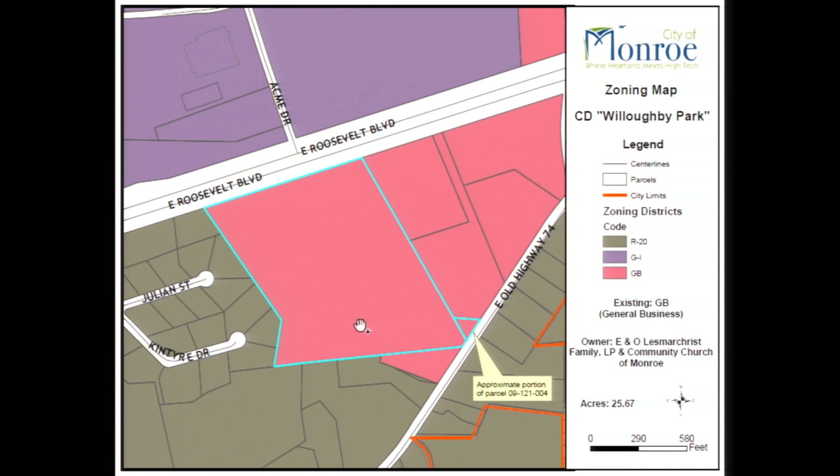The applicant is requesting the conditional district in order to develop 84 single-family lots. The total area of the project is 25.67 acres, with 7.9 acres, or 30.8% of that, left as common open space. The density of this project is

3.27 units per acre. The minimum lot size proposed is 5,500 square feet, and the average lot size is 7,155 square feet. The proposed setbacks are 20 feet for the front, 10 feet for the rear, and 5 feet for the sides. The project is required to provide at least 12.5% open space, which would equal 3.2 acres.

The total area of open space provided is 7.9 acres, or again 30.8% of the overall site. The open space will also include a gathering area with picnic tables and a fire pit, a playground, and a walking path. Just to orient you to the site, East Roosevelt Boulevard is up in the northern part of the site plan, with East Old Highway 74 down here to the south.

The proposed amenity areas are here, which is the gathering area with the fire pit, the proposed playground, as well as the walking path here near the stormwater management in the south of the site.

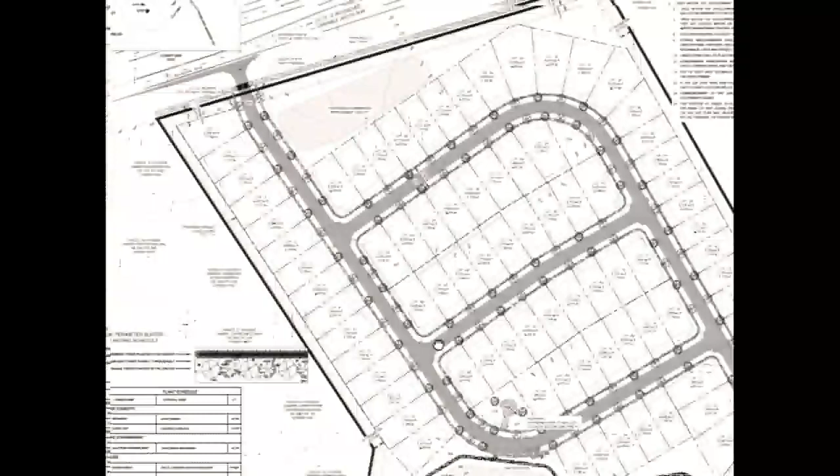Again, just to orient you, the block surrounding the site plan is the 25-foot landscape buffer, which will have trees and shrubs as outlined in this diagram. There will also be a 6-foot tall fence located along the back of lots 1 through 14.

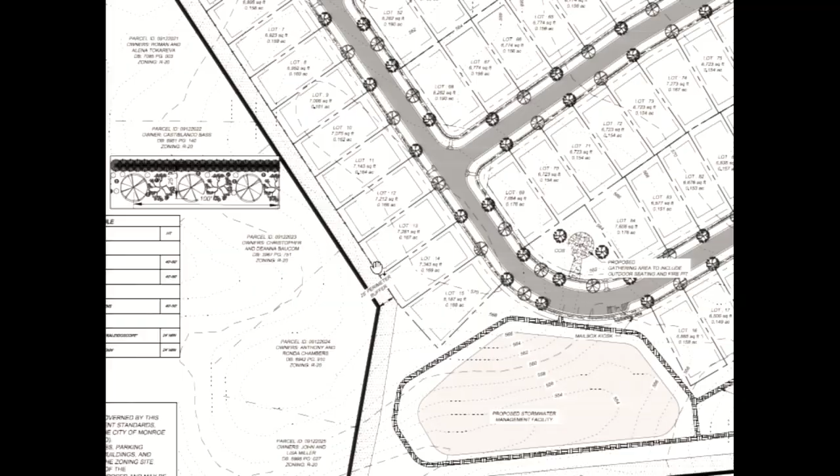A 5-foot wide sidewalk will be provided along both sides of the interior streets throughout the development. A 10-foot wide multi-use path will be provided along the exterior of the project along US Highway 74, or Roosevelt Boulevard. The applicant will also be required to provide stormwater management to treat the stormwater runoff for the project. The stormwater will be evaluated and reviewed, if the project is approved by City Council, at the building permit stage of the process.

The development is proposed to be accessed by 2 entrances. One entrance will be a right-in, right-out only off of East Roosevelt Boulevard to the north. There will also be one full access entrance proposed on East Old Highway 74. This entrance off of East Old Highway 74 is accessed through the adjacent parcel.

This entrance is not required, so it's possible it would not be constructed and the proposed development street would end in a cul-de-sac or other turnaround approved by the city's engineering department. Please note that part of this rezoning does include this portion of the property for the access point, so it's there if they need it.

As far as getting access from the existing property owner, they are working through that, but it is not required due to the number of lots. So it's possible the development would just end in a cul-de-sac here at the property line, or something similar as approved by the engineering department. Again, it's not required because they have less than 100 lots.

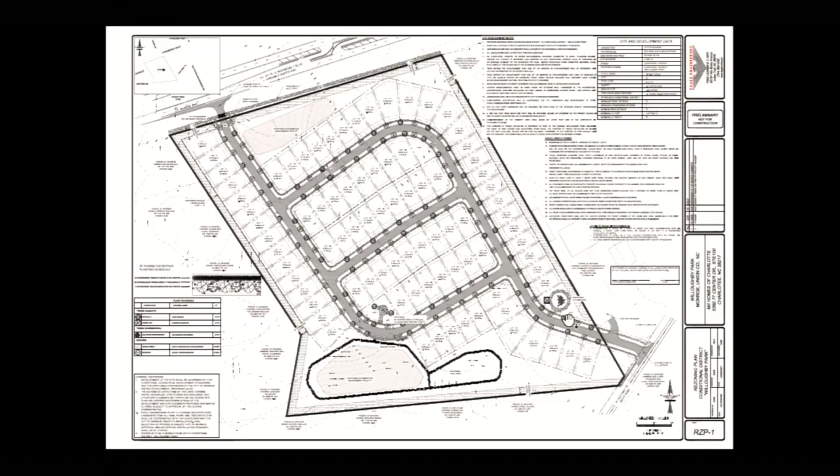The developer is proposing 75% of the homes will be 1,900 heated square feet, with the remaining 25% of the homes at least 1,700 heated square feet.

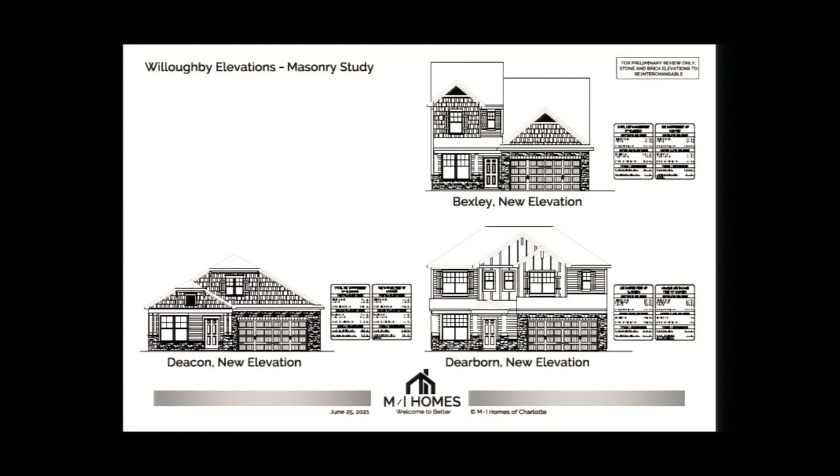The proposed exterior building materials will include fiber cement, stone, stucco, and/or brick. A minimum of 25% of the front cladding will be either stone, stucco, or brick. Vinyl will only be utilized for trim work.

Houses will be built on slab foundations, with a 4-course brick along the slab. Each home will have a minimum of a 2-car attached garage. All front-load garages will have carriage-style trim or hardware that mimics carriage-style garage doors, and driveways will be able to accommodate at least 4 vehicles.

This development falls within the following school districts: Rockrest Elementary, East Union Middle, and Forest Hills High. According to Don Ogrum with the school system, the proposed development is not expected to adversely affect school enrollment versus capacity.

The applicant did hold a neighborhood meeting on June 3rd, 2021 at the Community Church of Monroe, which is adjacent to this site. The meeting also had a virtual attendance option through Zoom. Approximately 15 individuals attended this meeting.

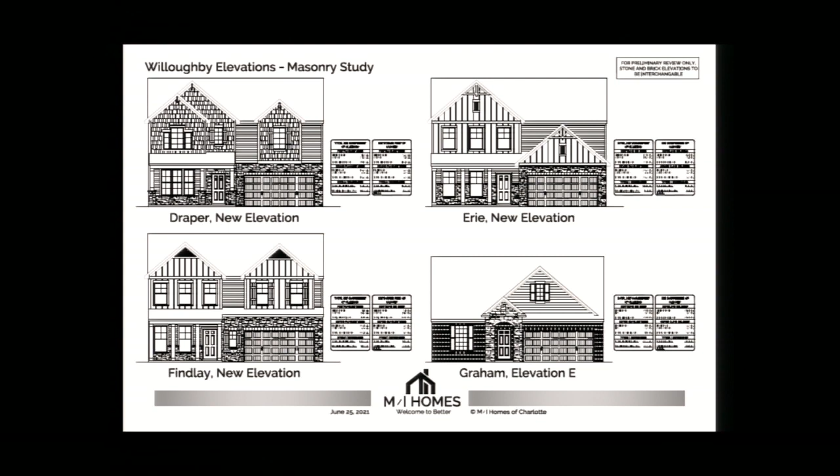Rezoning notification signs were also posted on the property, and 32 official rezoning notification letters were mailed to adjacent property owners, located within 150 feet, 10 days prior to the public hearing.

The land development plan indicates this area is suburban. While residential uses typically take the form of neighborhoods with uniform housing types and densities, a mix of housing types and lot sizes is preferred in suburban locations. The density for suburban residential is 2 to 4 units per acre.

The proposed project is consistent with the future land use plan. Planning staff recommended approval of the project, while Planning Board recommended denial of the rezoning with a 5-2 vote.

The following changes have been made since the Planning Board meeting. The applicant increased the heated floor size from 1,600 square feet to 1,700 square feet for 25% of the project, and 1,900 square feet for 75% of the project.

The applicant also added a solid opaque fence along lots 1 through 14 for additional screening. They increased the street tree and yard tree sizes from 1.5 inches in caliber at planting to 3 inches in caliber at planting, and added a fire pit in the proposed gathering area near lots 69 and 84. I'll be happy to answer any questions you may have.

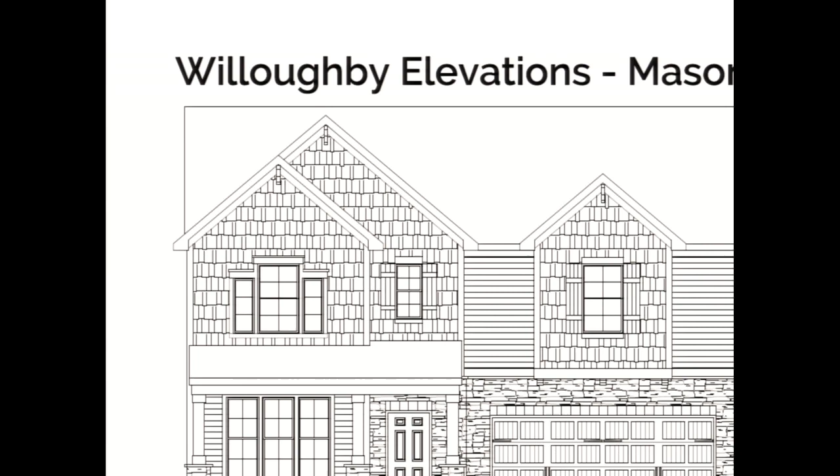Gary, I have a question. The buffering between the Knollwood subdivision and this proposed subdivision, you said was 25 feet? Yes, and then the fence as well along the lots that abut that neighborhood.

What was the planning board's main objection? Planning board had concerns with the density, the overall density. I will say it's more dense than the majority of projects we've seen recently, but it is within the 2 to 4 allowed by the future land use plan.

How many houses per acre? They're at 3.27. That's not the footprint, that's the whole taking in extra land, is that right? That's for the whole site, including their open space.

So you said it was a 5-2 vote with planning recommending denial? Mhm, yes. But you stated that they went back and made changes per the request made by planning board? They didn't reduce the number of lots, but they did increase the house sizes, and that was another concern we hear from planning board often is house size as well.

So the 1,700 square feet for 25%, and then 1,900 square feet for 75% of the project. So the majority will be close to the 2,000 square foot range roughly.

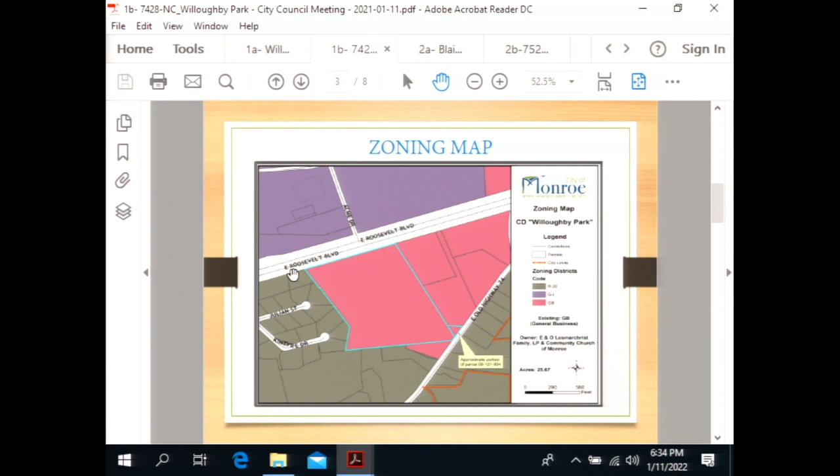Can I zoom in on this maybe? Here we go, just to give you an overall picture of the site plan. These blue areas here are stormwater ponds. This is where we'll catch and detain all the stormwater off site. We'll clean it and then slowly release it as if nothing was ever developed on the site.

This is where the kids' park is, with the gazebo and play area on the side here. This is the second gathering area with benches and the fire pit area that we added. This gives you a better picture of where the buffer runs along the entire perimeter, as well as the fence on this side neighboring these properties. That was a request from one of the neighbors to have a bit more permanent screening, so that will be 100% fenced along that side.

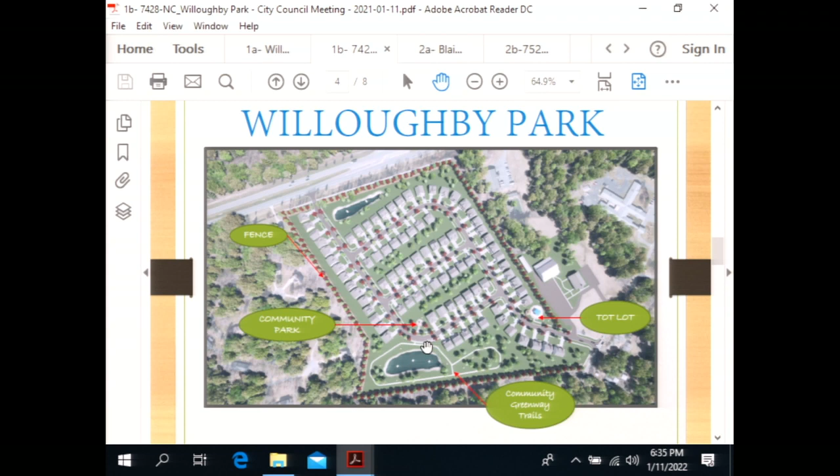Per DOT, they requested we put a right turn lane in, so coming off of 74 we'll have a right turn lane into the site as well. But you can see in between the houses there are many areas where we can leave trees and make it natural, especially on the trail here in the back. We'll leave it as natural as possible.

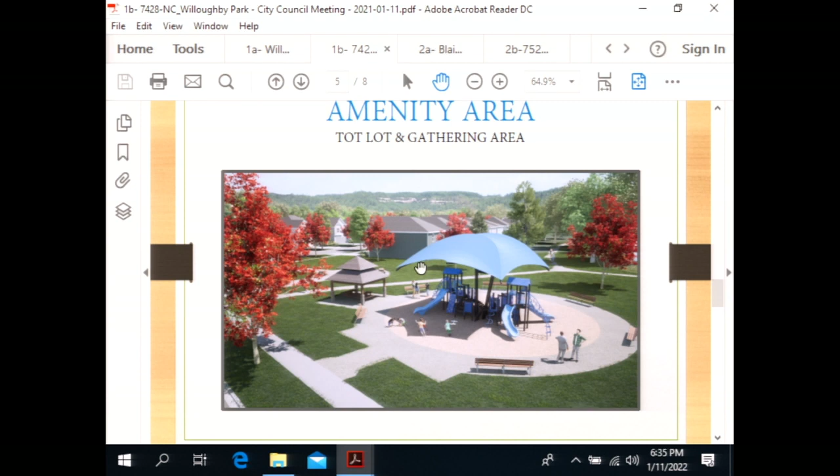This gives you a picture of the proposed park area. Again, a nice covered area with a picnic table, benches, and a nice high-end playground for that piece of it. Nice monument signs on the front for that area of what we're looking at.

I do have some elevations that I'm going to show. Mr. Chad Lloyd from MI is here to speak on the elevations and talk through their product line. I'm going to turn it over to him now to talk about it, but I'll be around for any questions you guys have as well. Thank you.

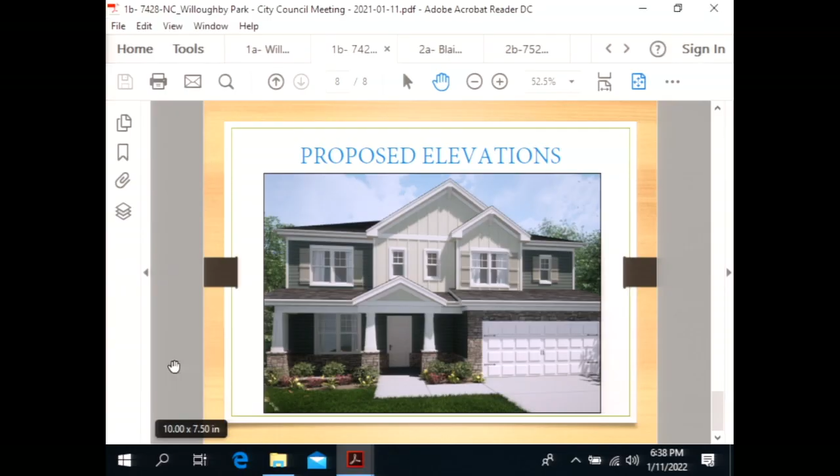We hear here all the time from new developments that abut existing developments, and those people are sorely disappointed when the areas adjacent to them, up to their property line, are clear-cut. I don't have much faith in a fence. It might look good upon being installed, but nobody ever maintains them. I can take you around and show you numerous developments we have here, commercial and residential, where those things don't last very long.

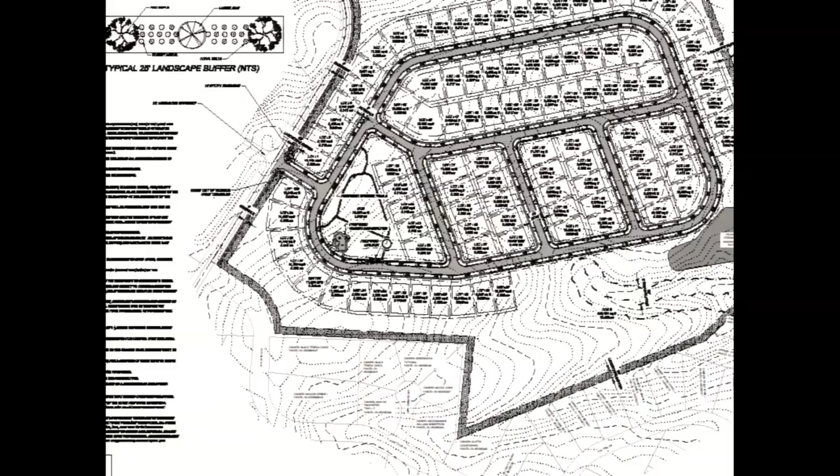The project is required to provide at least 12.5% open space, which would be 6.47 acres. As mentioned, the total area of open space provided is 21.3 acres, which is 41.12%. The open space will also include a natural walking path and gazebo with benches. The main amenity just mentioned is located here towards the entrance of the site.

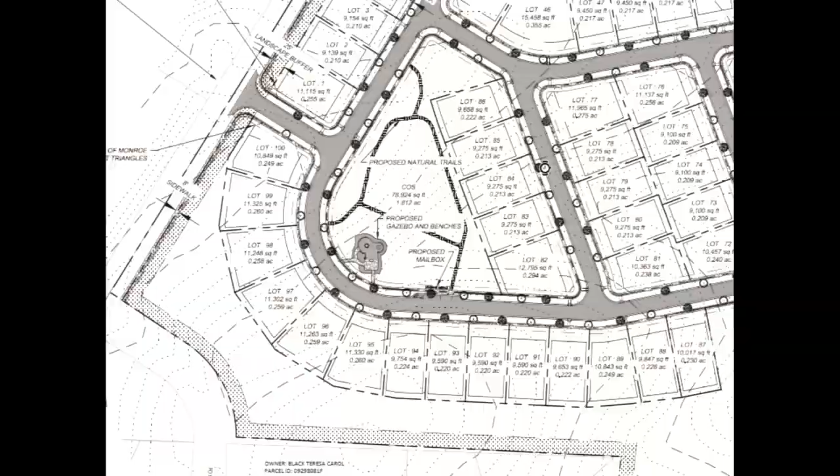Street trees will be provided at a rate of 1 per 50 linear feet, and each lot will also have at least 2 front yard trees. Additionally, a 25-foot landscape buffer is being provided along the perimeter of the site, which is the darker block surrounding the site.

A 5-foot wide sidewalk will be provided along both sides of the interior roads throughout the development. Additionally, an 8-foot wide sidewalk will be provided along the frontage of Fowler Seacrest Road.

The applicant will be required to provide stormwater management to treat the stormwater runoff for the project. The stormwater will be evaluated and reviewed, if the project is approved by City Council, at the building permit stage of the process. The development is proposed to be accessed by one entrance off of Fowler Seacrest Road. The entrance lines up with the Woodridge Senior Living Community, and a traffic impact analysis was not required by the City Engineering Department.

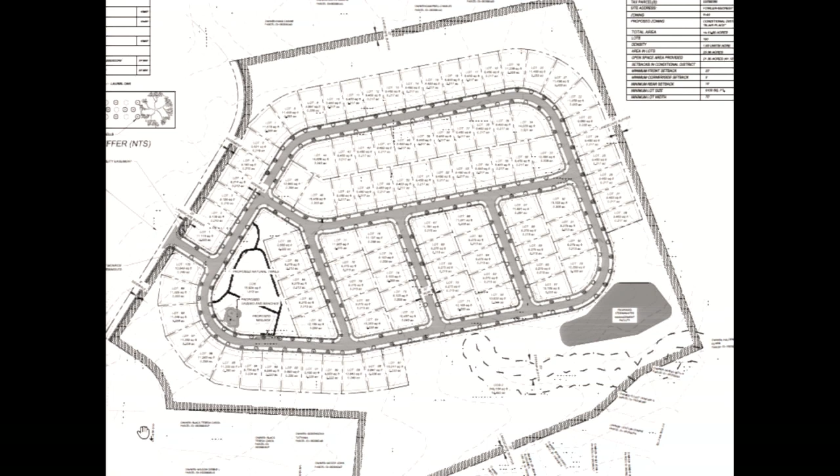The developers proposing the homes will be a minimum of 1,400 heated square feet. Primary building materials on all sides will consist of stone or brick, and secondary materials may consist of fiber cement materials. Vinyl will not be permitted as a building material, and brick veneer will be used on all of the foundations as well.

Each home will have a minimum of a 2-car attached garage. All front-load garages will have carriage-style trim and/or hardware, and driveways will be able to accommodate at least 2 vehicles.

The development falls within the Porter Ridge Elementary, Piedmont Middle, and Piedmont High School districts. According to Don Ogrum with the school system, the proposed development is not expected to adversely affect school enrollment versus capacity.

The applicant held 3 neighborhood meetings on April 21st, 2021, June 22nd of 2021, and September 8th, 2021. The meetings were a combination of virtual and in-person.

2 rezoning notification signs were also posted 10 days prior to the public hearing, and 113 official rezoning notification letters were sent to the adjacent property owners located within at least 150 feet, again 10 days prior to the public hearing. The following change has been made since Planning Board and was also mentioned at Planning Board as a change.

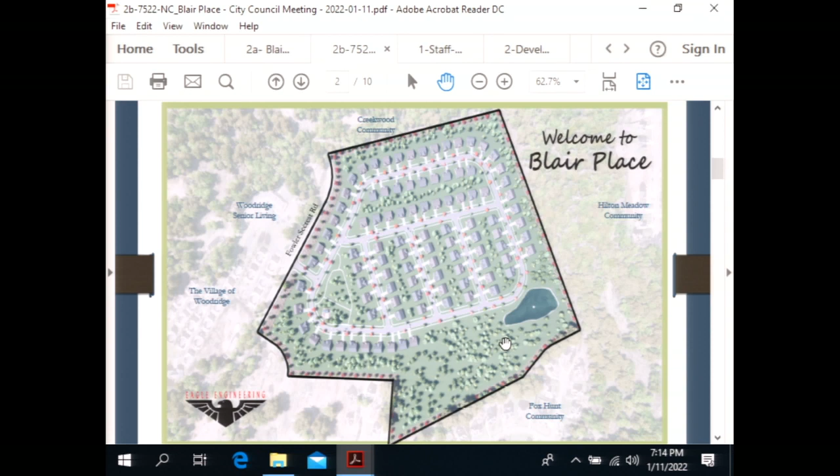Zoom in, kind of gives you a look at the way the entrance is. Again, off to the right, you can see we're leaving all the trees down here on the back side of it. It's a nice gathering area in the middle.

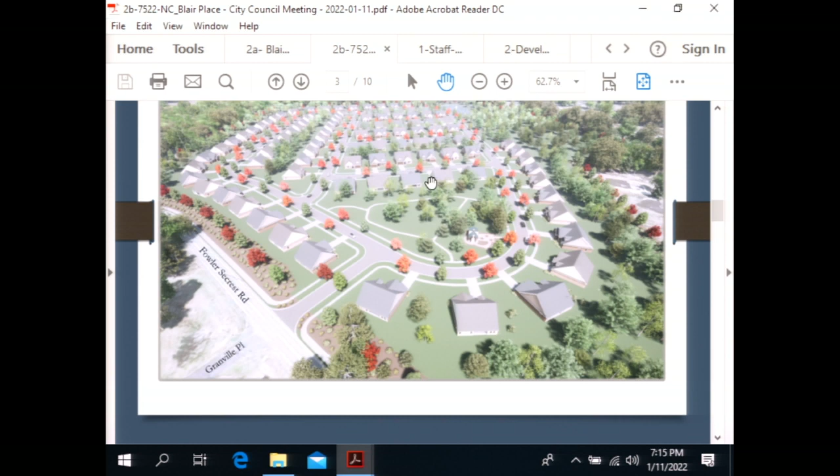One of the key features is that it's a 55 and older restricted living facility with all brick or stone houses, so there won't be any mix of materials on the facade like we normally do, that 25% mix. These are brick, stone, or stucco houses, no vinyl or hardy plank.

This gives you an example of the fireplace area and gathering spot we have in the middle with trails around it. We will try to leave as many trees in that area as possible to bring through when we have the trails. These are sidewalk trails, but we can do natural trails only because it is age restricted.

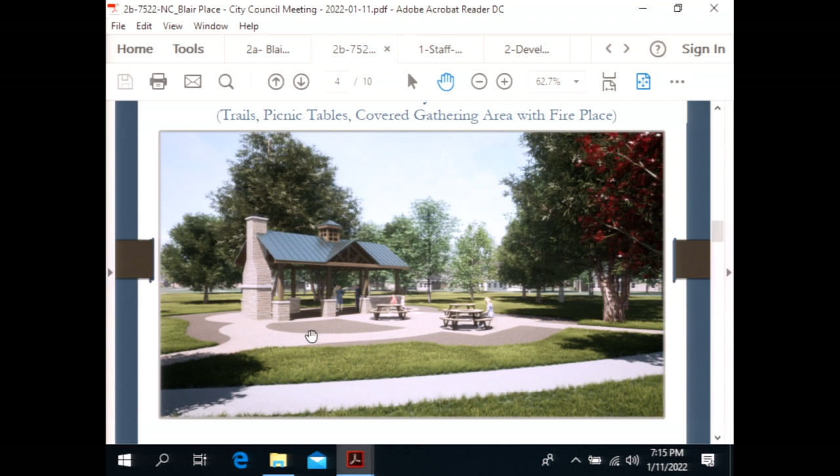The sidewalks might work better in that area, so currently we are proposing sidewalks in that community gathering spot.

Nice picture of our monument sign. You can see the front buffer, and behind it, as well as the full brick houses along that side. Again, just trying to do the upscale look.

If you ever drive on Fowler Secrest, you can see the subdivision down there that has that nice landscape buffer. That's this. So when you're driving around, you have a nice landscape buffer that kind of shields you from the houses right off the road. Even with that, we're pushed in a good bit so you won't see it. It allows it to be more natural than what you see now, that's the scrub growing over there.

We do have a sidewalk along Fowler Secrest. At least if you're talking about safety, there's a gentleman who walks that road every day. If you're ever on it, you'll see him walking sooner or later. We're at least doing our part to try to extend that sidewalk for him, to give him a safe space to walk. So we will have a sidewalk along our entire frontage.

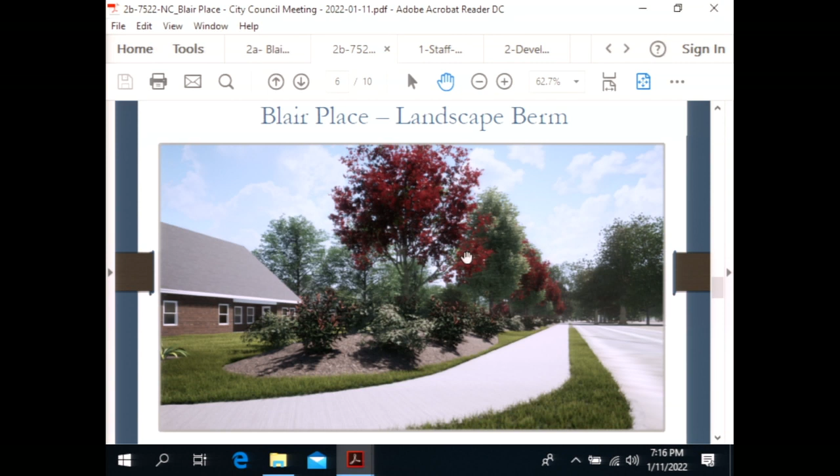Some elevations. Carrie showed you more than what I have here. You see brick or stone, a nice mix.

This is the option for the garage on the front. Everything's going to be one-story ranch style. If there is a room up top, it'll be like a bonus room, you might have a bathroom, but no two-story houses in this one. So unlike the berm and the neighboring houses where you see taller houses, this will all be one-story buildings on this property.

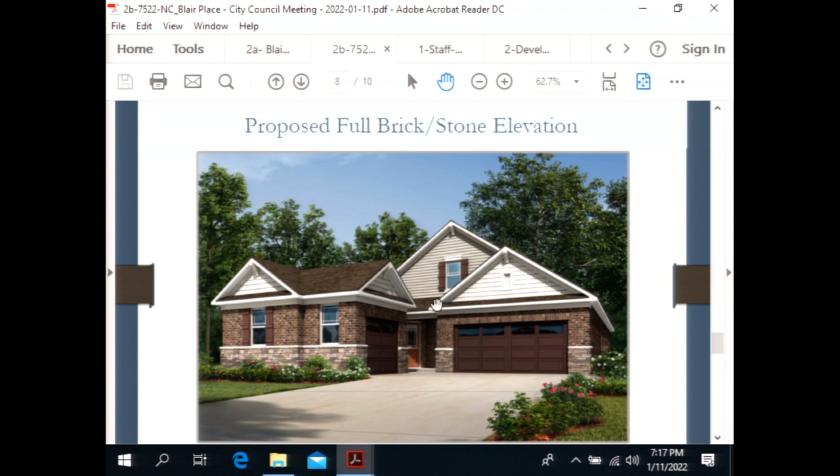And then some of the key features, and I know the big concerns are traffic and schools. This, being age restricted, has zero impact on local schools, there are not going to be any kids going to schools.

Traffic, I'm going to actually show a chart below it. This is actually less impact on traffic than a by-right product. So at 50 homes by right, this subdivision, age restricted, actually has less impact on the roads than that one.

The stormwater ponds go over and beyond. The city requires 15-year detention and quality, we're doing 25-year detention and quality. Open space, I think the city requires 12.5 or 15%, we're doing 41%, 21 acres of open space. And again, a lot of that we can leave natural, especially on the fox hunt side.

Kind of working through it, the way that the age 55 and over restriction works is it's governed by the covenants, and with that, staff asked us to send a report once a year, or the HOA will send a report to the City of Monroe once a year to make sure we're following those rules.

Reduce traffic, high quality construction, again, masonry and stone on all the exteriors, gazebo, fireplace, benches, and then stormwater pond. This is the trip count the traffic engineer did. You can see the senior detached homes total 44 versus 50 homes at a normal traditional one at 52. So this is a reduction in traffic as well.

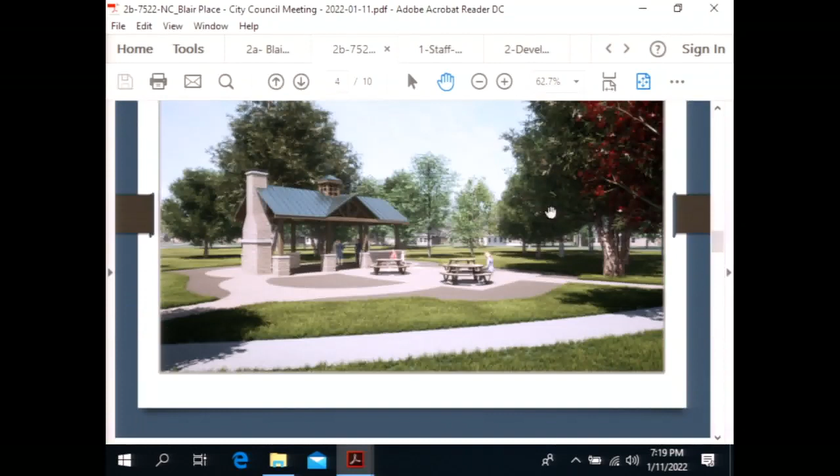So I just wanted to add a little bit of color to some of the things that Matt made, his general comments and presentation. As part of this project, when we first started, we were actually at 134 lots. We had anticipated doing a market style of project.

We were going to do an R10 zoning, 10,000 square foot lots. Over several meetings with the neighbors and adjacent residents, what we realized is the traffic was a major concern and the stormwater was a major concern. So we said, okay, what can we do to address the major concerns that we're hearing about?

At 134 lots, we had an access point into Fox Hunt Estates. We realized right away from the very first meeting that was a non-starter. So how do we get rid of that? Well, for ingress and egress, anything more than 100 units requires a secondary means. So we immediately reduced our lot count. We went to 122, then 119, ultimately settled at 100, which is a 25% reduction. That's not a small number when you're talking about density, and obviously we're running a business. That's a substantial amount of units that have been removed.

Next, we added a right-in right-out that was close to that curve everyone has mentioned and knows about. They mentioned many times during the process that it was an issue people had real concerns about, with kids and safety and everything else. That was actually recommended by our traffic engineer and supported by DOT, but we still decided that's probably something we should remove just because the temperature doesn't feel good for this. People don't like it, they don't want it there, it doesn't make sense. So what we did was we left one main access point across from the Woodridge Senior Living Facility.

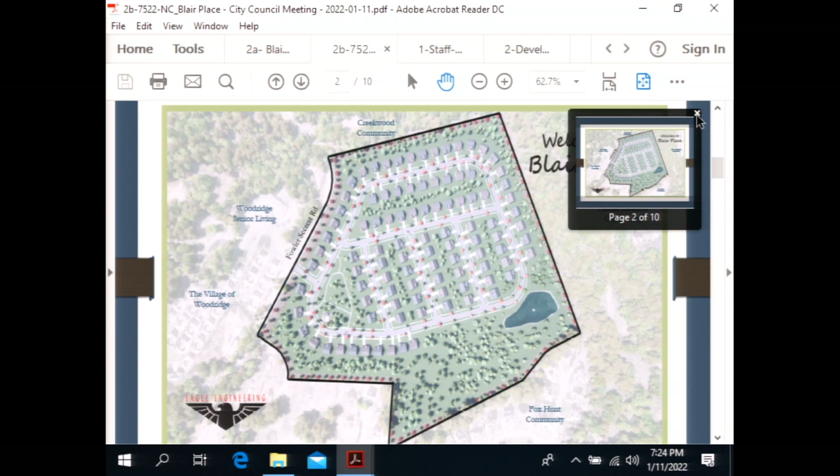Good evening. You would know that my mask would get caught on my earrings, so please excuse me. And I was one that signed up to speak before—may I do that now, or would you like to ask questions first? What would be the best way to proceed?

Again, I'm Anna Rushing Duvall. I live at 388 Triangle Road in Lexington, South Carolina. I am a graduate of Forest Hills High School and grew up in Union County. I'm one of the members of the Ann Sechrest Rushing Limited Family Partnership, which owns this land. We, the family partnership, are asking for the council's approval to rezone our property located along Fowler Secrest Road. I want to establish that this property is owned by a family, not a corporation or investment firm, but a family with generational ties to this land. When we reluctantly acknowledged that it was time to let go of our last parcel of land on Fowler Secrest Road, we wanted whatever became of this land to be very special.

We want something that will honor our memory of playing in the farm fields on the land while also serving the residents of Monroe. We believe the final proposed project for an active adult community meets those goals as well as honors the concerns of the community. The developer's desire to listen to and understand the community's apprehensions, and their willingness to make significant changes to their proposal to address those concerns, is commendable. Last week, my brother sent an email to this group summarizing the substantial changes the developer made in response to the community's concerns. I hope you had a chance to view that email and note the extent of all the concessions that have been made.

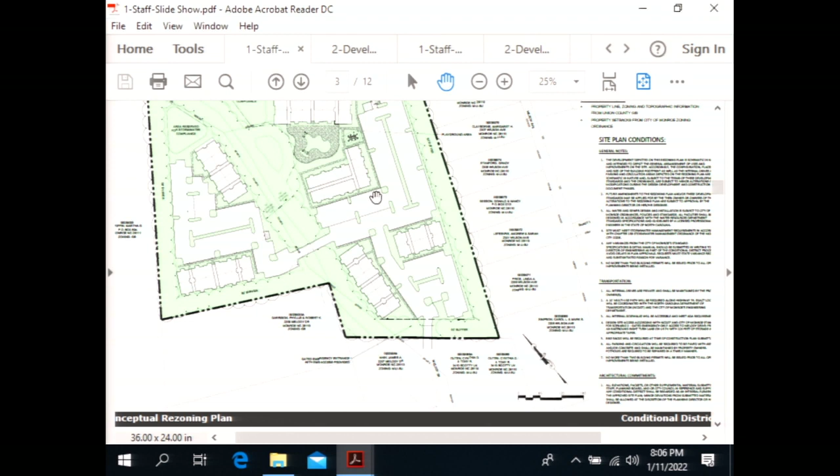The developer is required to provide a 10-foot multi-use path along the exterior of the project on Highway 74, located in this area. It would be paved like a sidewalk, but it's required to be 10 feet wide.

This project falls within the Rocky River Elementary, Monroe Middle, and Monroe High school districts. Per Don Ogren with Union County Public Schools, the project is not proposed to have an adverse impact on enrollment versus capacity.

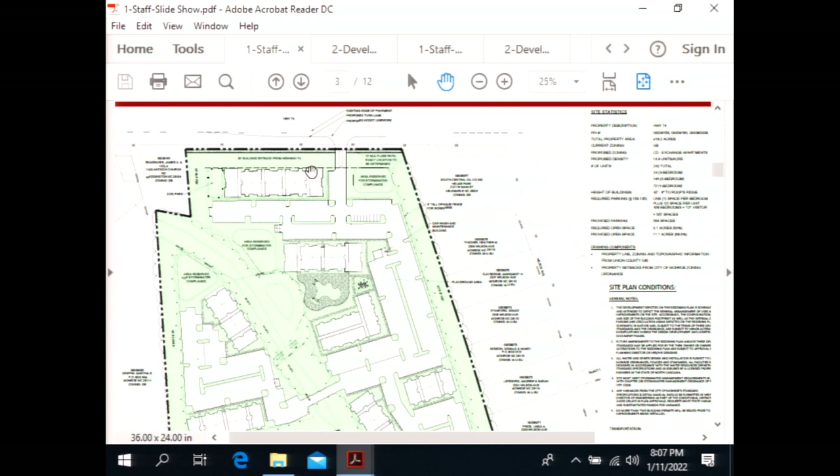This is a colored site plan, so you can see the landscaping or buffer along the sides and rear. This is why I mentioned the streams - there is a 50-foot stream buffer required. The stream goes through the middle of the site here, and that's the landscaping you see, which will be undisturbed as well. You can see the buildings here. The main amenity area will be located in this area, as well as the parking lot landscaping required for the site.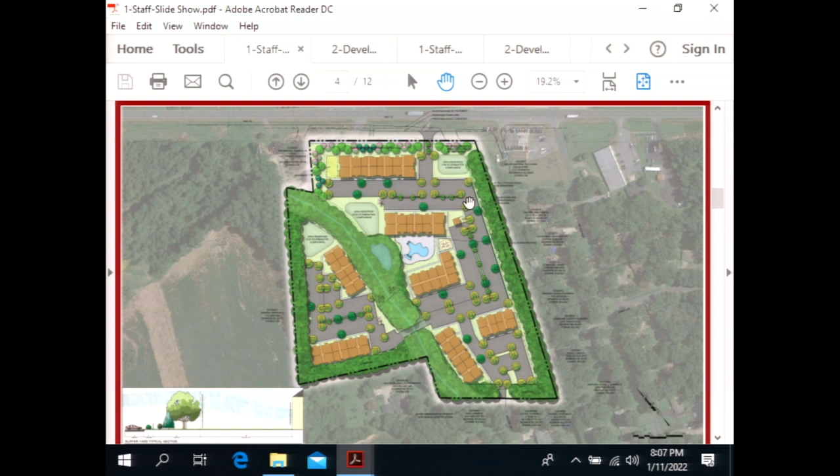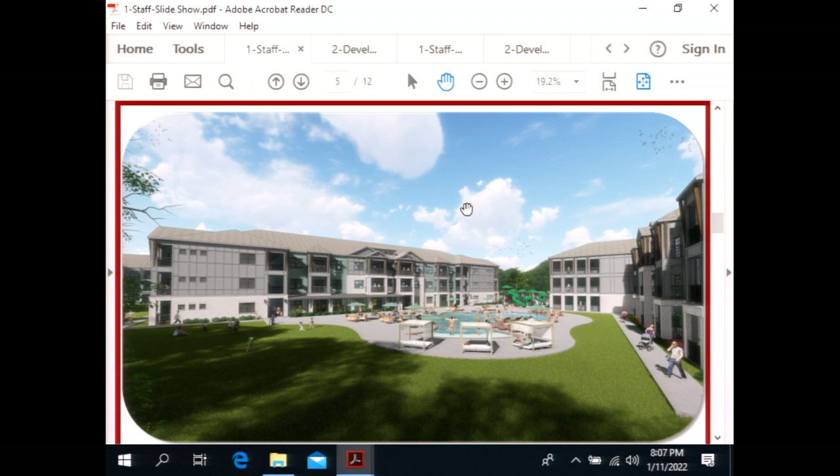For the elevations, the developer is proposing exterior building materials to include fiber cement, stone, and/or brick. Vinyl siding may be utilized for eaves, soffits, and windows. As for square footage, the one-bedroom units will be a minimum of 600 heated square feet, the two-bedroom units a minimum of 900 square feet, and the three-bedroom units a minimum of 1,100 square feet.

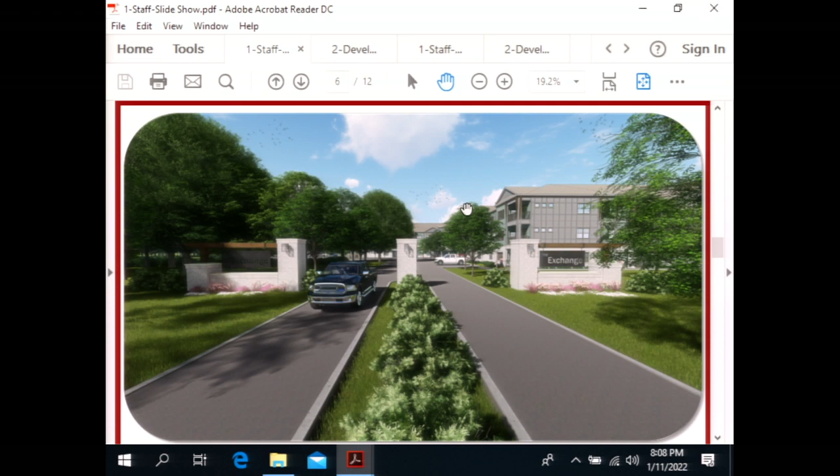Again, this shows their access going into the site, and this shows an example of the gated access that will be along the rear - possibly a different type of gate they would use. I'll say it again: the gate will be siren-activated and only utilized for emergency vehicles to access.

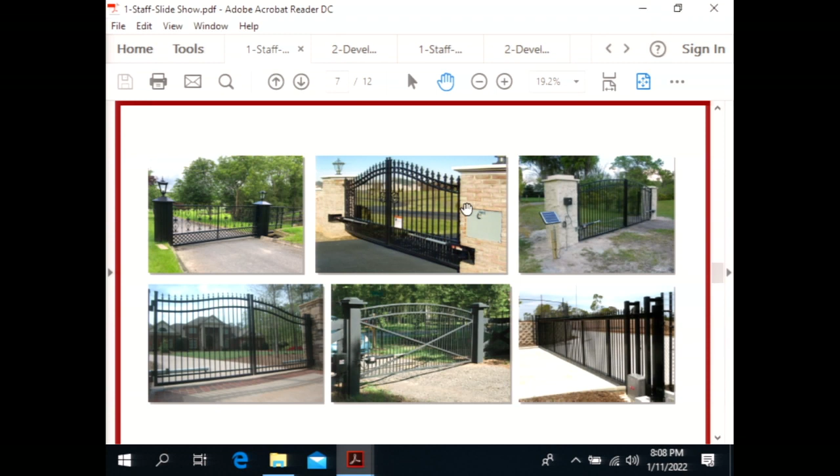This project does fall within the land development plan known as the community corridor, and a very small portion on the back portion of the suburban corridor, but primarily we deemed it to be a community corridor since it was over 95% within that area.

The community corridor does allow a density of up to 10 units per acre and does promote multifamily and commercial uses. Plan staff is of the opinion the development pattern of multifamily residential at this location at 14.9 units per acre is not consistent with the land development plan, but is a reasonable use for the property being located on Highway 74.

The developer did have a neighborhood meeting on June 7th to discuss the project with the neighbors of the area, and there was a significant turnout. We had approximately 25 to 30 people at that meeting.

The property was posted 10 days prior to tonight's public hearing, as well as there were 48 properties that will receive mail notifications of tonight's meeting.

Plan staff did recommend approval of the conditional district rezoning for apartments, and the plan board did recommend denial of the conditional district rezoning for apartments with a 7-1 vote. I'll be glad to answer any questions if you have any at this time.

You said planning board and staff both approved this? Tell me, I missed it. Plan staff recommended approval of it, and planning board recommended denial 7-1.

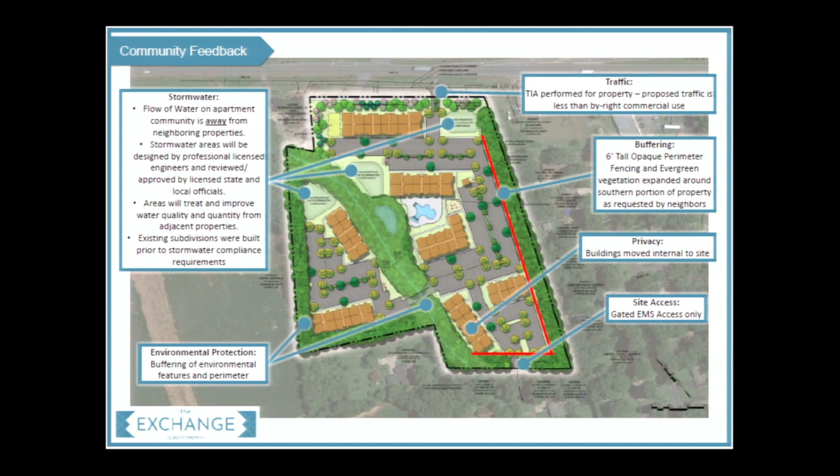The benefit of having a licensed landscape architect on staff for the project is that we automatically get a good planting plan that observes low maintenance, high quality evergreen material. As part of that privacy for existing residents, we actually reoriented the buildings so that no windows face the adjacent neighborhood. We had buildings that were up against the property line, and we have oriented those away.

So we did a couple different examples. We wanted to find the closest home to the property line and the closest home to the closest apartment building.

The closest home to a property line is 100 feet away. When you combine that with the 50-foot perimeter buffer, as well as an additional 10-foot planting strip and privacy fence that we're proposing for the site and committing to as part of this proposal, we have more than 160 feet from a home to a parking aisle, basically a parking bay.

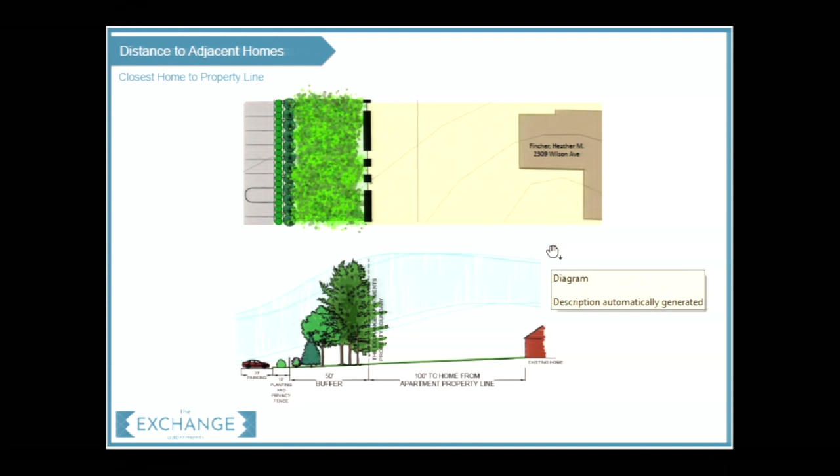The closest home to the closest apartment building is more than 210 feet away, and that does include the 50-foot buffer as well as the 10-foot planting strip and fence.

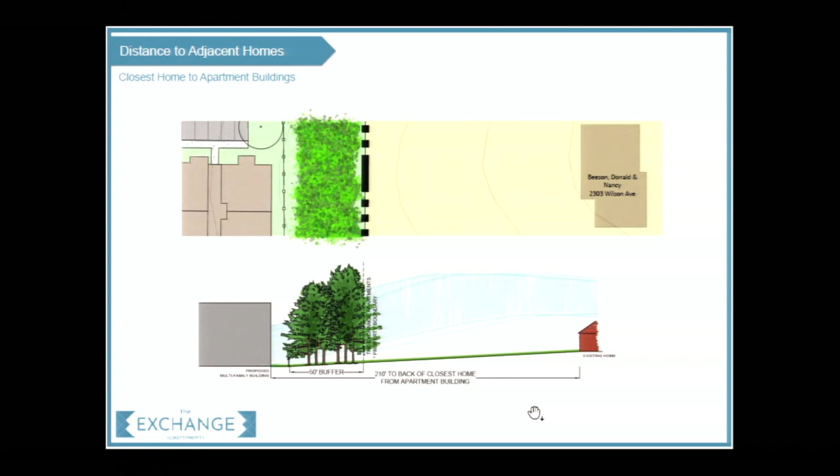We just wanted to give you an idea of how we developed this plan in the first place, to give it a little bit of history. We start with the entrance off of 74, and the first thing we wanted everybody to see is the amenity building. The amenity building would take place on the first floor of the first apartment building, and you'd be able to see through it to the pool area and the amenity area behind it.

We wanted to make sure to give the buildings as much green space around them as possible, and also to pull them away from that eastern property line to the extent that we could. We've got that gated access that is closed permanently unless there is an emergency vehicle that needs to access it and could not for any reason access it off of 74. And then we also just have our stormwater areas, our vegetated buffer, everything we've mentioned to date.

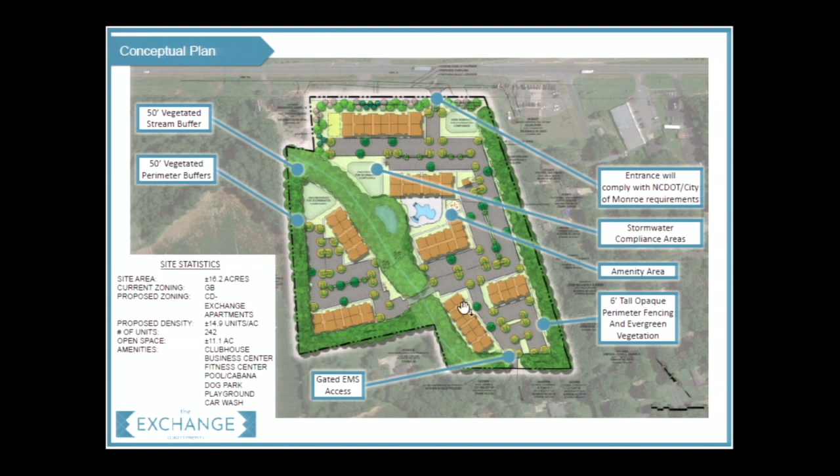This is our proposed amenities plan and list for the property. Again, pool, a bark park—it's not called a dog park anymore—play areas, car wash, fitness center, community center.

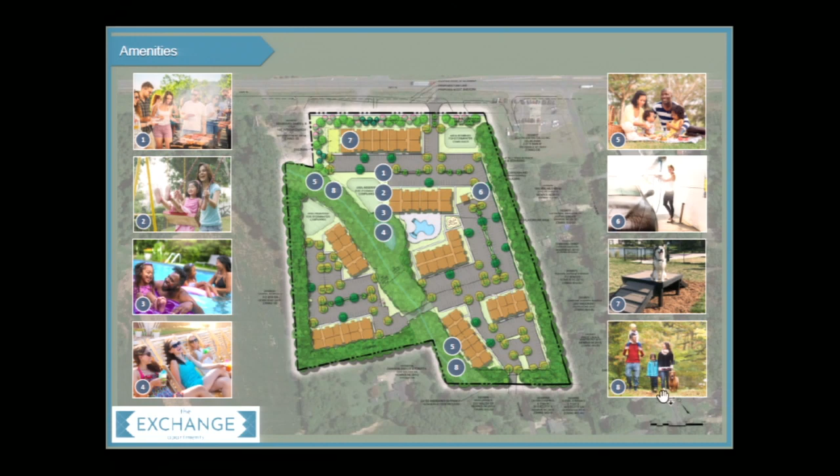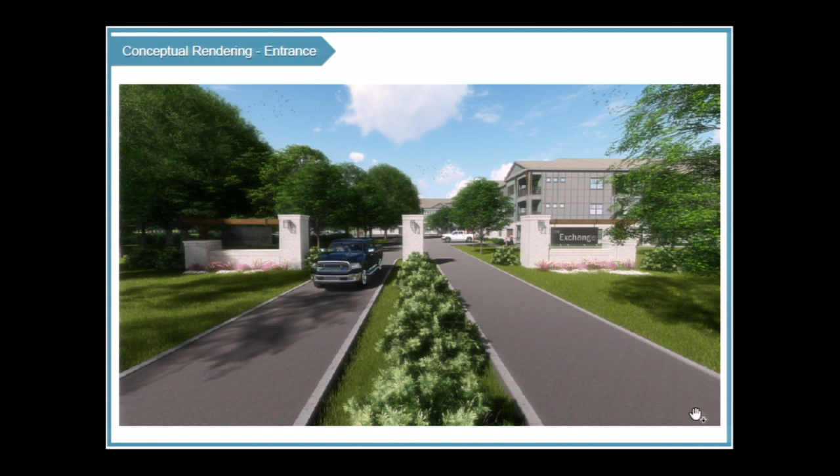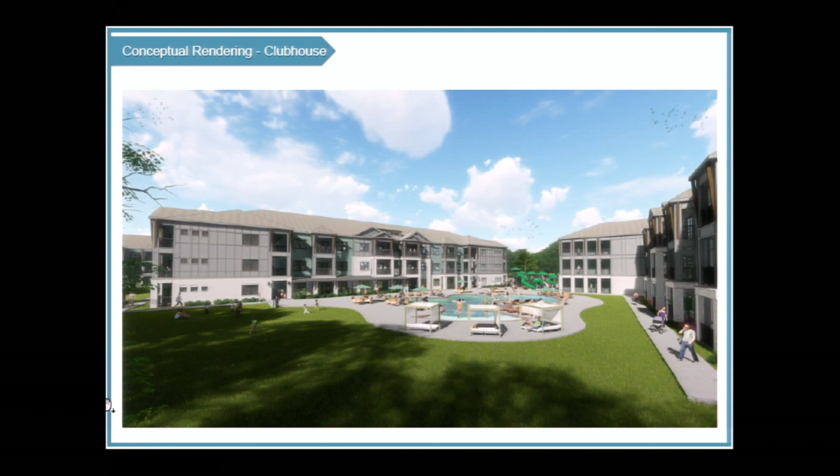Another current site condition. But this is what we would propose as part of the project. This is the new entrance off of 74 into the apartment community. We'd get to see the clubhouse at the very beginning, and we get to see a beautiful landscaped entrance off of 74, and again, the amenity center. So with that, I will open it for questions, and thank you again.

Council, have any questions for Ms. Shirley? Is someone else going to come up, Ms. Shirley? No, I think that's it.

Thank you very much. This is a public hearing, and I'd like to mention that we did get one written petition with 82 signatures in opposition.

Is there anyone here that would like to speak in favor of the project? If you would, please give your name and address, please.

Mr. Mayor, council members, my name is Robert Garrison. I live at 2209 Melody Drive. And I'm here tonight to express my support for the proposed rezoning of the two properties located on Highway 74 West.

This location on Roosevelt Boulevard would be a welcoming addition to the area with the proposed high quality apartment complex. Based on the quality of the builder's prior projects, these apartments, with the anticipated rent rates, the tenants will bring with them healthy, disposable incomes. This growth would be beneficial for the many small businesses and restaurants located in the shopping centers on Highway 74 going into Monroe: Poplar Place, Nottingham Plaza, Union Square, and of course Monroe Shopping Mall.

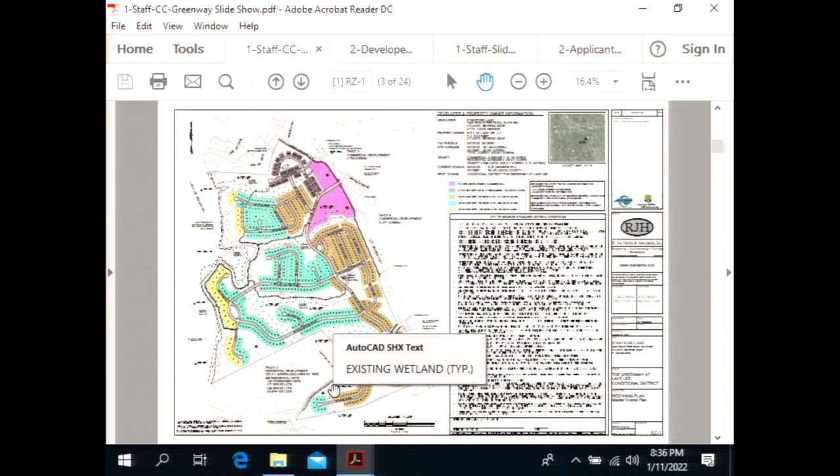The applicant is requesting a conditional district rezoning to develop a 689 lot residential subdivision, consisting of both single-family attached and detached homes with approximately 45%, or 154 acres, of open space. The 15.13 acres of commercial, if developed in the future, will be required to be processed as an amendment to the conditional district if approved.

The 15 acres of commercial is located here along 601. There's nothing that's part of the request tonight; they're not proposing any type of commercial. So if this project was approved tonight and they wanted to come back two years later to develop that commercial portion, they'd have to go through the amendment process to do what they're doing now, showing the whole process and a site plan. So the commercial is earmarked, but there are no development plans for any commercial project associated with this project at all.

The minimum lot size for single-family attached townhomes will be 2,200 square feet, with an average of 2,225 square feet. The lot sizes for the detached homes will range from 6,875 square feet to approximately 31,000 square feet, with an average of a little over 9,300 square feet. The density of the proposed project at 689 lots is 2.12 units per acre.

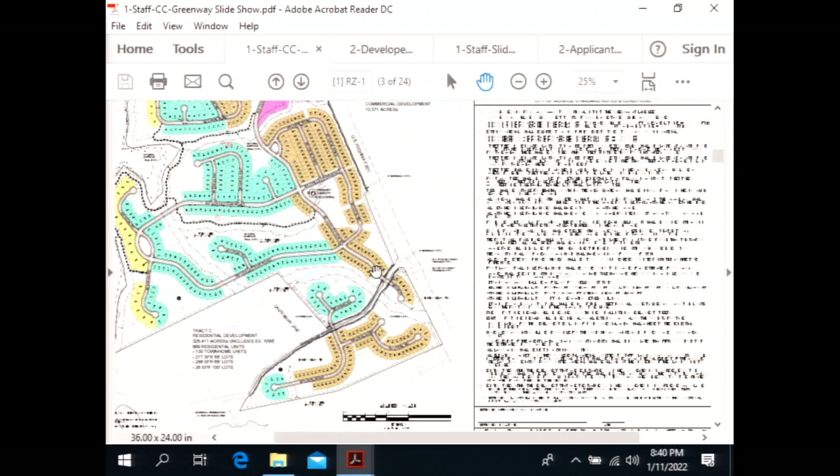The developer is proposing to install a 5-foot sidewalk on both sides of all interior streets, as well as an 8-foot sidewalk along the White Store Road frontage, an 8-foot sidewalk along the entire frontage of 601, and an 8-foot sidewalk on both sides of the portion of Marion Lee Road they're developing.

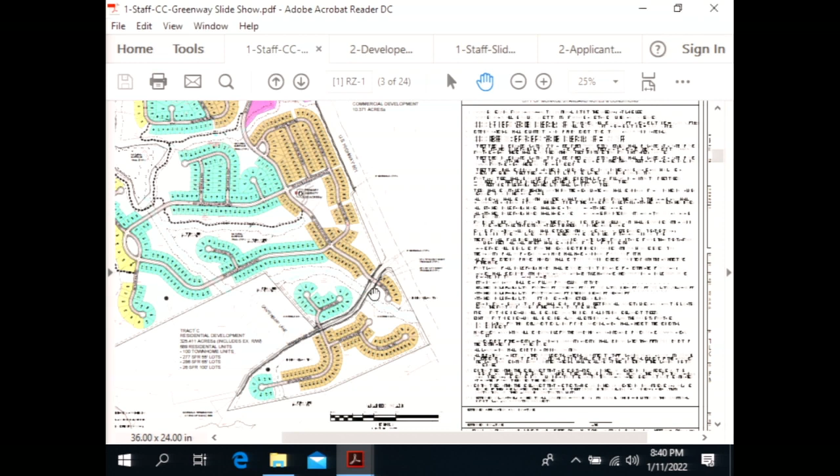The project is required to provide at least 12.5% open space of land area for the residential portion, which would equal approximately 40 acres. The applicant is providing 45%, or a little over 154 acres, of open space. Developers are proposing 6 amenity areas, 4 active and 2 passive.

Going through the amenities: the main amenity feature will be located in the interior of the site, including a 1,400 square foot cabana with restrooms, a swimming pool, a playground set, and fitness stations. Amenity A will be to the far north of the project and will include benches, playground, a general purpose field, and fitness stations. Amenity C will be at this location, including a sitting area and fitness stations.

Amenity D will be along the lake area, including fitness stations and a playground. Amenity E will also be along the lake area, including sitting areas and fitness stations. And finally, amenity area F will be south of Marion Lee Road, including a playground set and fitness stations.

All single-family homes will have sodded front yards prior to issuance of certificate of occupancy. The applicant has committed to 2 front yard trees for the 55, 65, and 100-foot wide lots at the time of CO, as well as street trees throughout the development.

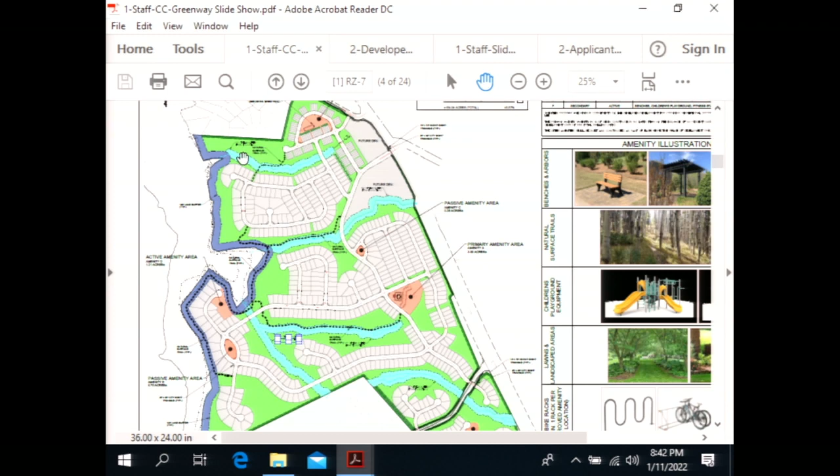As far as additional buffers on the site plan, they provided a 100-foot lake buffer along Lake Lee. The buffer will be entirely within the common open space, not within any lots, so it's strictly within the open space. They also provided, as required by the ordinance, a 50-foot buffer on both sides of the streams. The streams are the light blue areas in this location, here, here, here, and here, and those areas are required to be undisturbed.

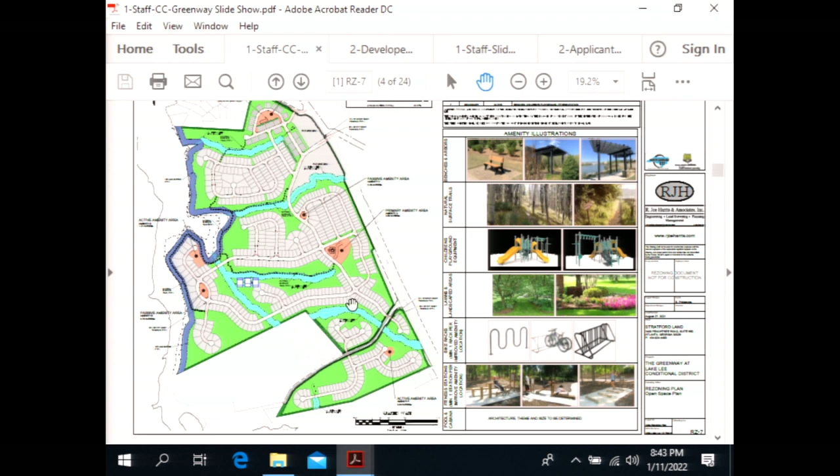Again, this shows the buffers a little bit better here. You can see the lake buffer and then the stream buffer where everything was turned off. This also shows their landscaping and street trees throughout this project.

There's a minimal amount of floodplain located within this project, less than an acre, located down in this area. The floodplain on the site is strictly within the open space, not on any lots.

As I stated, all the streams will have a 50-foot undisturbed buffer, and the lake buffer is 100 feet. The proposed lake buffer at the site will also be located entirely within common open space and will remain completely undisturbed.

For stormwater, the applicant will be required to provide stormwater management to treat the stormwater runoff for the project. The stormwater will be evaluated and reviewed, if approved by City Council, at the building permit stage. This property is located in a critical water supply watershed, which limits the overall impervious area to no more than 36% for the overall development, including the future commercial, which would all be reviewed if the project is approved at the building permit stage.

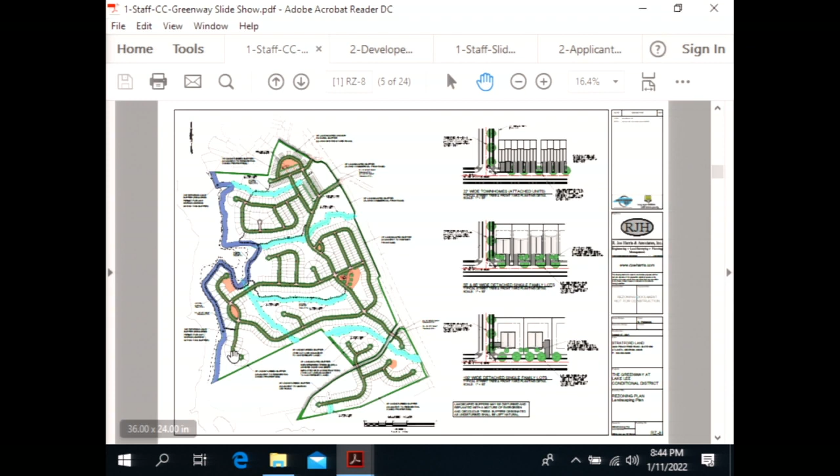Now I'm going to start going into a little bit of the transportation stuff. The project was required to do a traffic impact analysis, and I'll go through the improvements.

This location here is the intersection of Highway 74 and 601. This would be the Jack in the Box, Hilltop, Metro Medical, and the Food Lion area.

There's currently a right turn lane that allows you to turn right off of Highway 74 onto 601. The developer, per the traffic study, will be required to add an additional right turn lane. There's currently one left turn lane that allows you to turn left off of 74 onto Pageland Highway. Developers will be required to install an additional left turn lane, providing 2 left turn lanes to turn left onto 601, and 2 right turn lanes to turn right onto 601.

Finally, there's currently 2 left turn lanes that allow you to turn left off of 601 onto 74. The developer, per the traffic study, is required to install a 3rd left turn lane. There's no road widening or extension of the pavement. DOT stated that if it's geometrically feasible, they will require it. I'm not giving you a concrete answer on whether it's required or not - that will be determined by DOT when they go through construction plans and survey data.

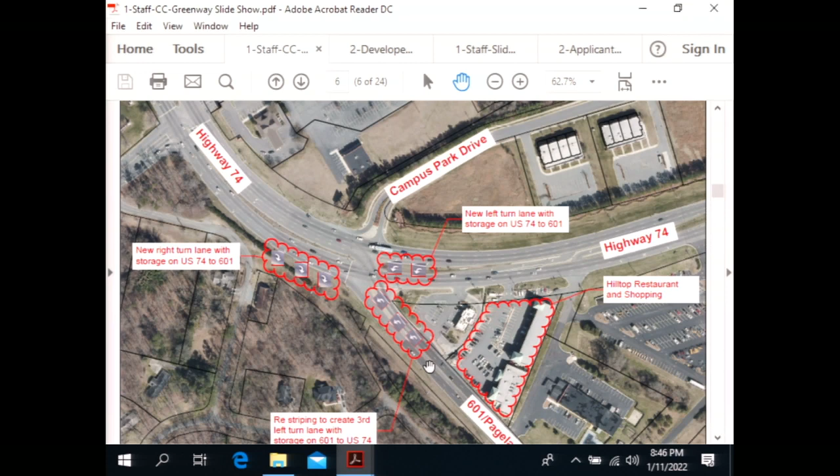DOT feels that they can squeeze another turn lane in there, but that won't be finally determined until the time when they go to submit.

This is now up here at the top - we were at 601 and 74, now we've gone a little bit further down. This is the Cottage Green subdivision, and this is White Store Road on the other side.

Developers are required per the traffic analysis to install a right turn lane on 601 to turn right onto White Store Road. They will also be required to install a right turn lane on White Store Road to turn right onto Pageland Highway, or 601.

On the other side of White Store Road, at this location, which will be the main access for the project, they'll be required to install a stoplight. They'll also be required to install a right turn lane on White Store Road to turn right onto Pageland Highway, and a through lane so you can go straight across White Store Road to cross 601 into the project.

The developer will also be required to install a left turn lane on White Store Road to turn left onto 601, all regulated by the stoplight. On 601 itself, they'll be required to restripe and create a left turn lane to turn left off 601 onto White Store Road, as well as a left turn lane going north to turn left off 601 into the project.

Within the project itself, for those leaving, there will be dual left turn lanes to turn out onto 601, as well as a right turn lane and a straight lane. All roads within the project will be reviewed and approved by engineering, and they'll all be maintained by the City of Monroe as public roads.

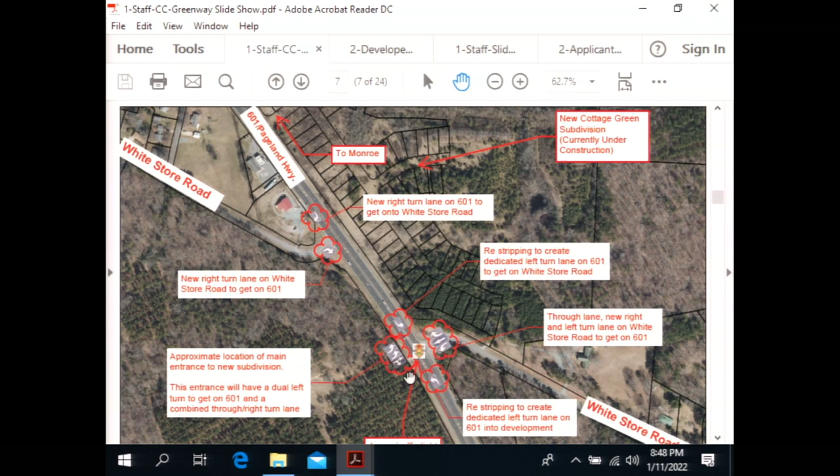Now to touch on the elevations. As stated, we're going to have single-family attached townhomes and detached homes within the project. There are 100 townhomes and 589 detached homes.

The exterior building materials will consist of brick, fiber cement, stone, and stucco. Developers are proposing the front facades of all homes to consist of at least 25% brick or stone. Vinyl will only be used for eaves, soffits, trim, and windows.

The minimum heated square footage of the single-family attached townhomes will be 1,360 square feet, excluding the garage, and the minimum for single-family detached homes will be 1,600 square feet, with a range up to 3,200 square feet, excluding the garage. Homes built on a slab foundation will have a brick or stone water table extending at least 18 inches above the finished floor on the front and side facades.

All 26 of the lakefront lots will have side-load garages, and the developer has committed to a minimum of 50%, or 143 of the 65-foot wide lots, also having side-load garages. So the minimum number of side-load garages in this project will be 169, between half of the 65-foot wide lots and all of the lakefront lots.

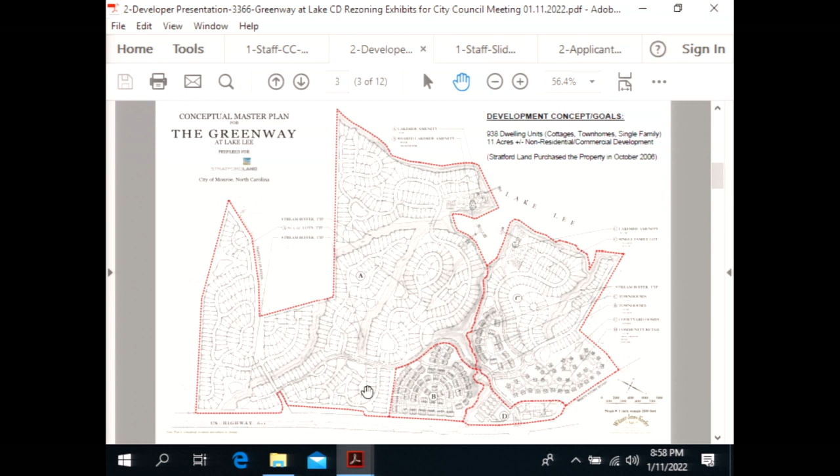We went to a committee back in the day called the Development Committee that I don't think you have anymore, and this plan basically died at the Development Committee. What we were told was density needs to come down, lot sizes need to go up, and we need to work harder on our buffers and our adjacencies to our owners.

We took all that to heart and came back with this plan. I think you can really start to see the buffer areas between the little neighborhoods. A lot of these little neighborhoods may only be a street or a cul-de-sac or just a loop street.

With the natural trees and natural drainage ways that go between them, we still have the commercial areas here, and I'm not going to go through all the details like Doug did. Doug knows this plan, I think, better than any of us. I think he did a great job with that. But it still has the same components that we always had.

One question may be, well, why aren't they showing us what they want to do on the commercial? And the reason is because we don't know. We believe we've sized it properly, and we've provided the proper access and visibility for it. But when the rooftops go in, the commercial always follows later. We believe commercial development for this site is probably still 5 or 10 years away, even after the rooftops come in. We're happy to come back at that point, show you a specific site plan for the commercial area and work on that to the satisfaction of the city.

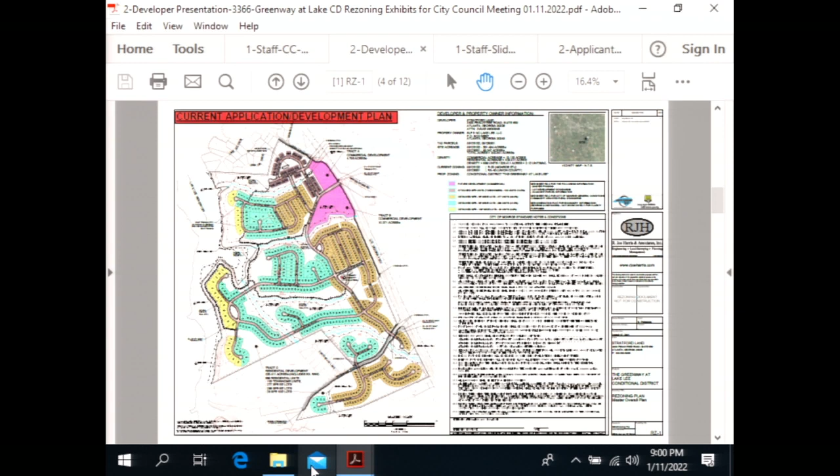I think Doug also did a great job of showing the amenity package. Open space areas, again, are kind of highlighted in this slide. I think it's important to note, I know Doug said it, but 154 acres, almost half of this property is open space. How often do you get that opportunity?

And a lot of this open space, it's open space because you can't develop on it, right? Because there are drainages and stream buffers associated with it. Well, the idea was to take advantage of those areas so that we can create something with a lot of open space around it.

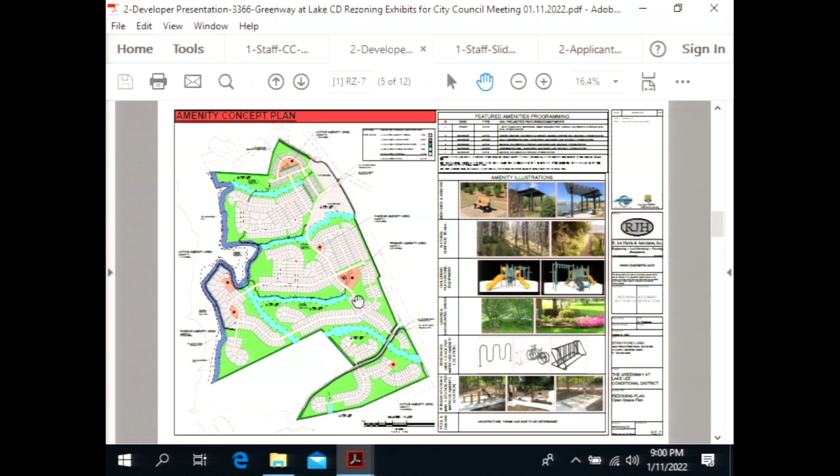When we did the 938 to 820, that was about a 118 lot delta drop in number of units. We dropped another 131 to get to the 689 that we're at today. So from start to where we are today, we've reduced the number of lots on this project by 249. I think that's a significant number. I think we're happy with it. I think we're happy with the result, and we would hope that you would be as well.

There are a lot of other things that are mentioned here, and I know that Doug kind of ran through these items. I'm not going to belabor all these, but I think these are very important concessions. These are ideas that came out of the neighborhood meeting. They came out of meetings with Doug and his group, and came from everybody in the area that we were getting feedback from on what they thought was good, what they thought was not so good. We listened to everybody that made comments, and we did our best to accommodate those.

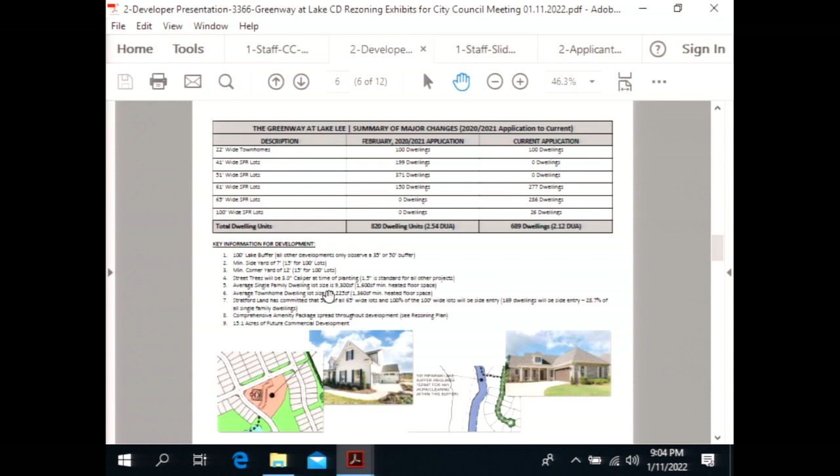One of the questions we got in several of our neighborhood meetings was about bald eagles. We had investigated that option before we bought the property - threatened endangered species reviews and reports are part of our due diligence. Sure enough, there were no nests, active or otherwise, in that report. But we thought, it's been 10 years, let's go look again. So we asked Allison Medford with the North Carolina Wildlife Resources Commission to do a study, and she did. She told us it's not uncommon to see bald eagles in this area, but we don't have any active or inactive nest on our property, which is the trigger for any kind of development regulatory action. That was a good comment from our neighborhood meeting, and we wanted to make sure they understood we followed up on that.

Likewise with traffic, an extensive TIA was performed for the property. I'm not going to go through everything Doug did - he did a great job showing all the improvements that are necessary. A lot of times when you're not adjacent to a highway, you don't have the luxury of being able to make the improvements you need to support your project. In our case, we're directly adjacent to 601. We can do the intersections, the traffic signals, the lane striping, and even the improvements at 601 and 74 to help that situation, which is what our TIA requires. It's expensive, but it's what it takes to make the project work from a traffic standpoint.

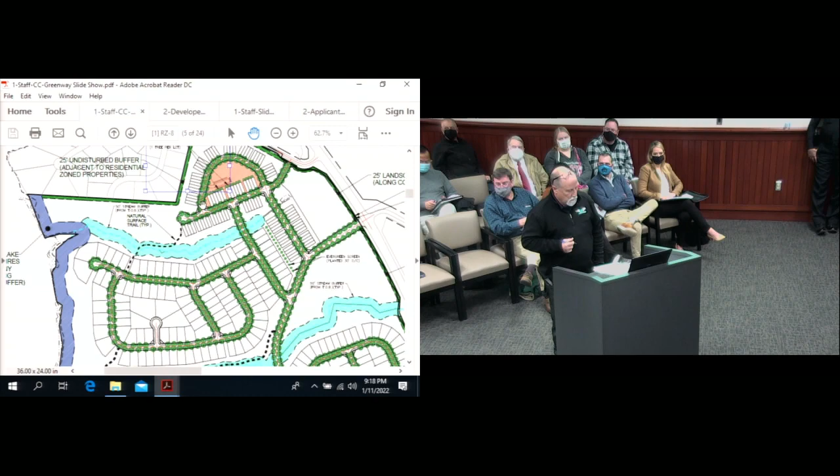Is there like only 5 feet from the property line? Why not show a true representation of the elevation? But density, I mean, we won't go through that again, everybody's already covered it. But why do people come to Monroe? They don't come, I don't think, for something like this.

And why did Stratford Land have to come to the city to try to get this approved? Why couldn't they do it with the county? Well, the county doesn't have the infrastructure, they're tapped out. How much longer before the city of Monroe is tapped out with water and sewer services? I understand there's the Catawba River project, but let's not use that as a crutch or workaround to address the Lake Lee drinking water.

We're not... well, just to play on words, when I first came in, the gentleman outside asked if I was going to speak for or against. I originally said against, but thinking about it, maybe I'm for Greenway now. Webster defines a greenway as a corridor of undeveloped land preserved for recreational use or environmental protection. Somebody mentioned the city or county coming up with a plan to help someone sell their property. This would be a good opportunity for the city to approach the county, which doesn't have the infrastructure to support this type of development, and maybe develop it into a greenway, like a King Creek Park type development.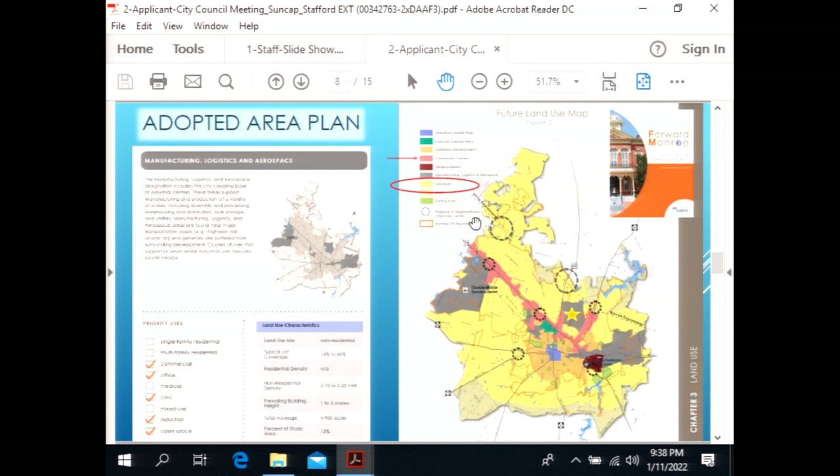Stepping back now, very briefly, I want to hit on the adopted area plan that I know Doug already went through, but this is projected to be an industrial site. When the land use plan was evaluated by planning staff, they decided that industrial zoning was appropriate for this site. That plan was adopted by city council, that industrial is the appropriate use for this site.

Interesting how we got here. I don't need to tell you guys about the status of the UDO, but we met with the Economic Development Department and planning staff in the late summer and gave them this proposal for an industrial economic development play here in Monroe. They said, great, the UDO is on the way, and the remapping process targets this as industrial, it'll essentially do it for you. As you all know even better than I do, that has not occurred yet, and the timing delays have run across our contractual delays. At this point, we just need to be on our own timeline and understand if this project is viable, rather than a project somewhere else outside of Monroe that would have to be taken into consideration otherwise.

So our proposed zoning is for industrial. We are pursuing the conventional general industrial district. I think it's important to note that this is a light industrial district, so no noxious uses. You're not doing the heavy manufacturing or really the heavy noxious uses. Also, my understanding is the city has purchased a site to the east of this one that is also targeted for industrial. So this is developing into an industrial area.

I'll just wrap up briefly. I know it's a late night for everyone. We do consider this an important economic development play for Monroe. I know it's a conventional request, but it doesn't take much imagination to understand that a property of this size and of this caliber from SunCap, a well-known property group, that this is an economic development play. A lot of you here on the board have helped build Monroe and make it someplace that these jobs and employment opportunities want to come to, these business opportunities. I would advocate that this is an increase for the tax base, an increase in jobs for Monroe, and in my opinion would spur on additional economic development opportunities for Monroe as well. So we're excited for this. We think it fits with the land use plan. We've taken some great strides to hopefully quell the concerns of the adjacent neighbors and stay outside their backyard. So with that, I will wrap up and ask if you all have any questions.

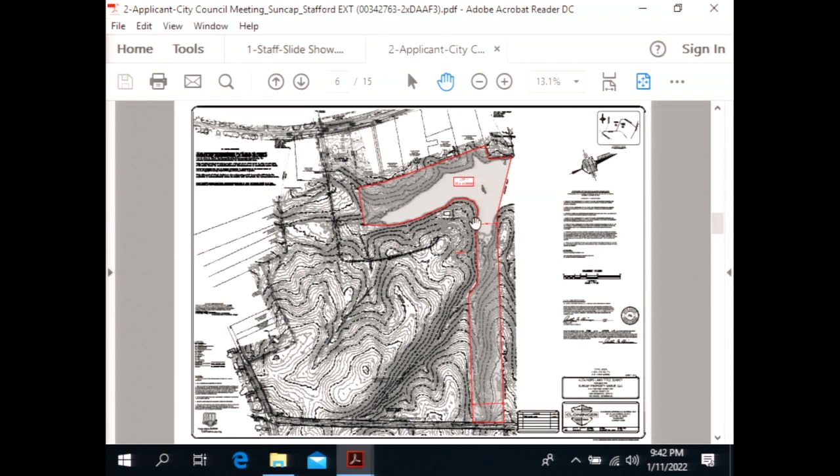Prior to our father's passing in 2016, he was fully aware that the farmland would be one day up for sale and would be a desirable piece of property for the development of Monroe and Union County. His lifelong business experience taught him that change is inevitable and growth will come. He told me before his passing that he endorsed the sale of the land, however it came to be, and that he supported the decision our mother would make after he passed away.

My siblings and I collectively and unanimously support our mother's desire to rezone the property and move forward with the development before you. I have here a sworn and notarized statement. I'm not certain how that process goes, but I'll be happy to share it with each of you. It is signed by her, notarized, in her support of this project, 100% support.